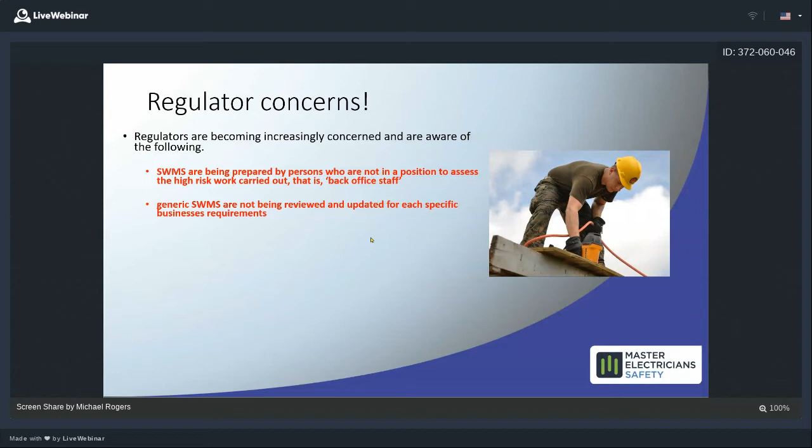That's a real problem, and I'll talk about that a little bit more later. There's some examples of people having SWMS for diving work in a folder on a construction site, where there was no diving work being performed, yet they were saying that the SWMS were specific to the site. Main contractors are not reviewing the content of subcontractor SWMS before work commences to ensure that they address the specific hazards of the construction project.

And on-site employees are not receiving instruction and training in SWMS, and that's a really important one. And if we get just these few things across today, it's going to make carrying out your work health and safety functions a lot more streamlined and a lot easier.

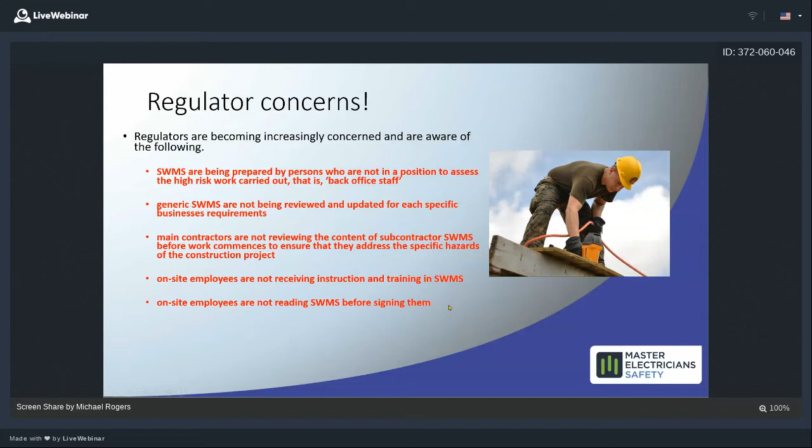On-site employees are not reading SWMS before signing them. In a lot of cases, people just rock up to site, where's the folder, put their signature on, and away they go. Then when a safe work inspector calls, if the work's not complying, the work's still being done, they're not stopping it. So the inspectors then stop it and say, okay, you're not working in conjunction with what you've agreed to do in this safe work method statement.

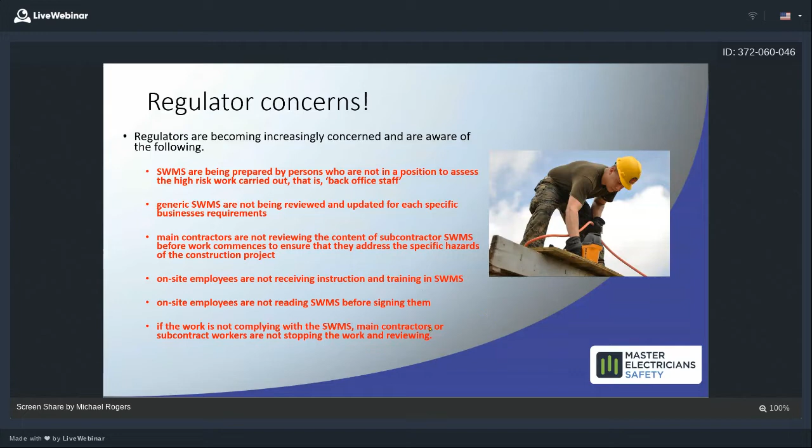And what I'm going to go through today is to try and dispel that myth that you need a SWMS for everything, and that you can really streamline your system. As I've said, the days of just buying packs, not reviewing them, not talking to your employees about them are over, if they ever really were in place.

So before we get to the SWMS, I'm just going to go through some industry jargon because we need to understand a few terms around the industry. So first of all, I think we all know what a SWMS is, safe work method statement. Then there's SOPs. If you've heard the term SOPs, that's safe operating procedures, but it can also be called standard operating procedures.

They can be for both safety-related things that aren't high-risk construction activities, as we'll talk about later, which is what SWMS relate to. But standard operating procedures can also include things like loading the photocopier with toner, or even how and where to save files on a network.

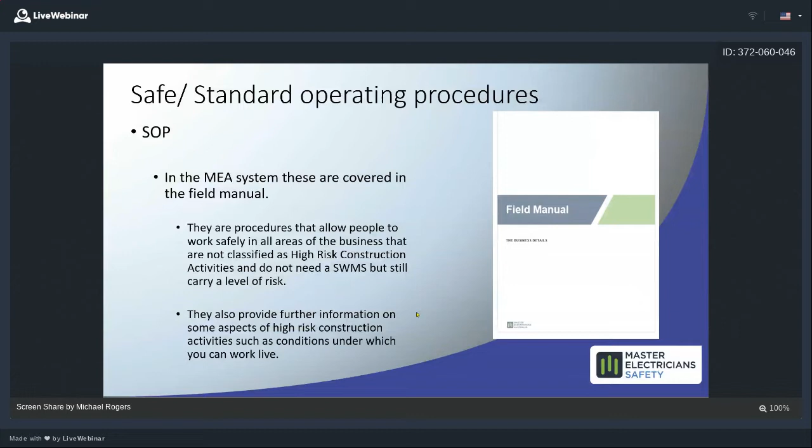Risk assessment - it's a legal requirement to carry out risk assessments prior to carrying out live work, and strictly under the four conditions for carrying out live work. Even if you've done a risk assessment, you still require a safe work method statement to be available on site.

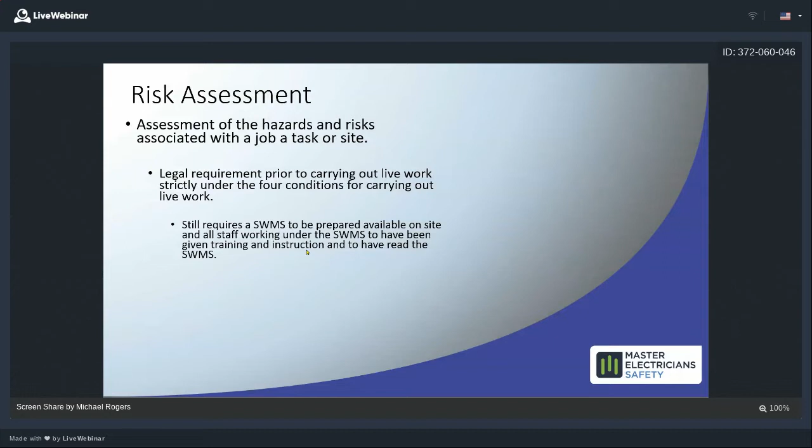The risk assessment is just about assessing the risks and determining whether or not that can go ahead. But the risk assessment is essentially just an assessment of the hazards and risks associated with a job, task or site.

They can be used as a means for developing SWMS. So if you're doing work in a particular type of construction all the time, you could do a risk assessment which assesses all the risks in that area and then develop your SWMS as a result. The overall process of risk identification, risk analysis and risk evaluation - that's the definition from the ISO guide.

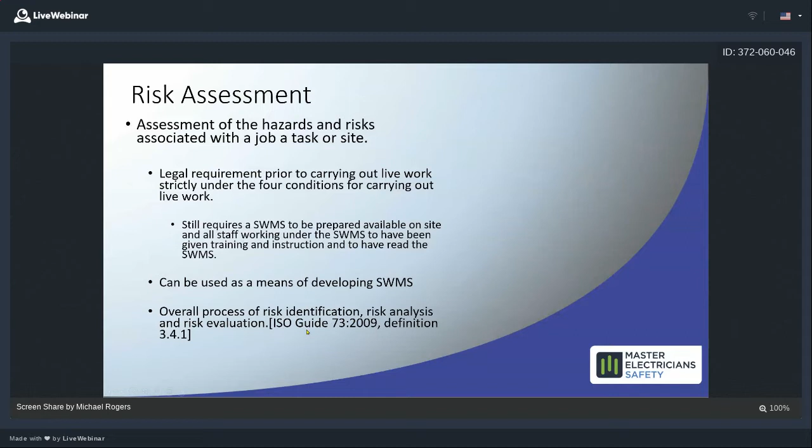A job safety analysis is a procedure which helps integrate accepted safety and health principles and practices - this is a definition straight out of standards - into a particular task or job operation.

In a JSA, each basic step of the job is used to identify potential hazards and to recommend the safest way to do the job.

Other terms used to describe this procedure are JHA, job hazard breakdown, and the other one you'll probably see is a JSEA, which is a job safety and environmental analysis, and that's quite often a term that's used as well.

Pre-start hazard assessment and control. This is probably one of the most important things that I want to go over today, and how that relates to SWMS and how it can really streamline how you manage your safety.

So this is the frontline control for hazard identification and control prior to starting work. It's essential and it needs to be documented, and I can't stress that enough.

If you are involved in a work site incident, this is one of the main documents that an inspector will ask for. They'll want to see how you identified and managed hazards.

The electrical industry is fairly unique in that every time we go to another site, we have a new set of hazards that we have to assess and control. So it's essential that we have this pre-start done, and I'll go through that.

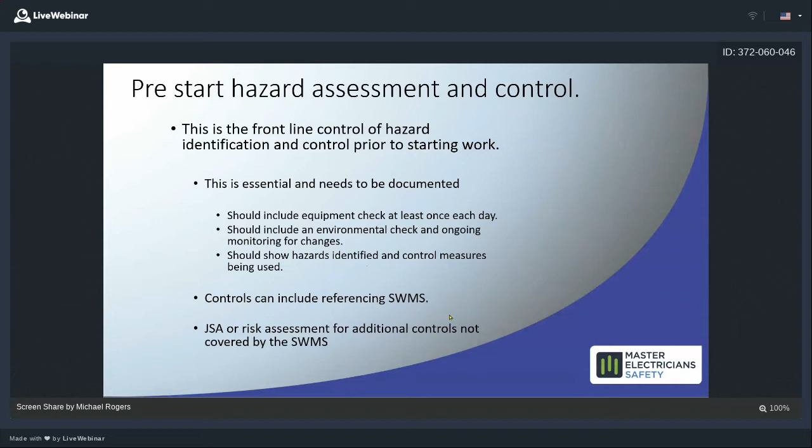I'll go through a simple form today that will show how this all fits together. First, definitions we need to know: the meaning of construction project, which is clause 292. A project, when a work health and safety person talks about it, involves construction work where the cost is greater than $250,000.

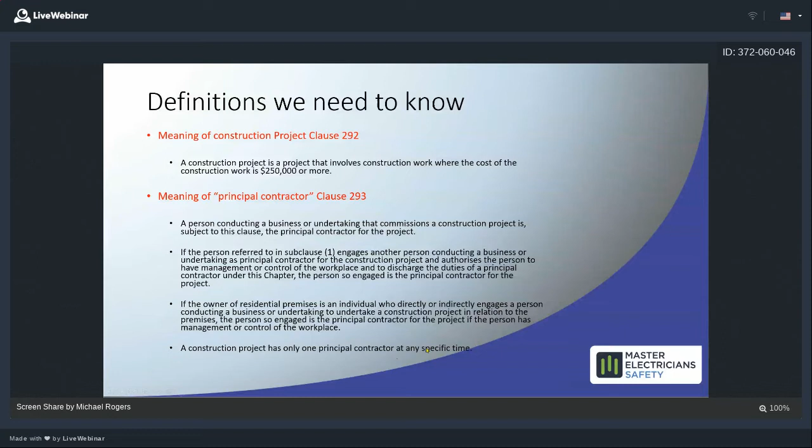That's a defined construction project, which in most cases will even include residential work. Now, the meaning of a principal contractor: the first definition is the person who commissions the construction project. That person can delegate control to a project manager, in which case the project manager becomes the head contractor for the purposes of who has to be given SWMS and who has to review them. If it's the owner of residential premises doing owner-builder work, you'll be the head contractor because you're engaging directly with them. There can only be one principal contractor at any specific time on a construction project, and this will make sense as we go through it.

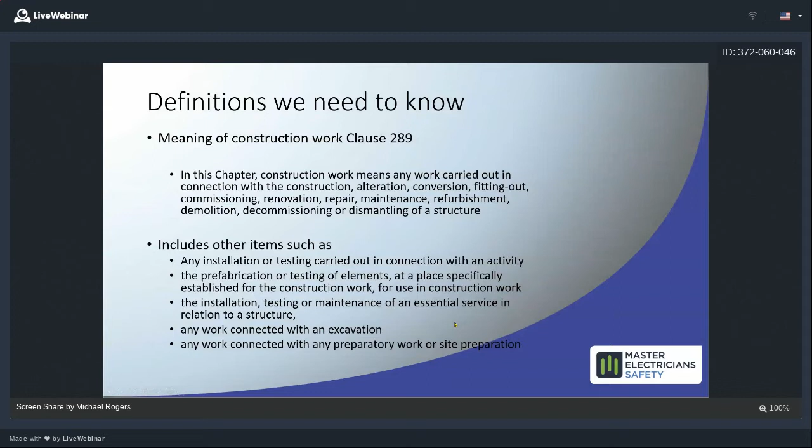Now we need to know the meaning of construction work. Construction work means work carried out in connection with construction, alteration, conversion, fitting out, commissioning, renovation, repair, maintenance, refurbishment, demolition, or decommissioning of a structure. Other items include any installation or testing carried out, which is fairly important for us. If we're testing switchboards, even if we're not modifying anything, we're still deemed to be carrying out construction work, and as such these high-risk construction activities require the use of SWMS. This also includes prefabrication or testing of elements, any work in connection with an excavation, and preparatory site work. So all of those things get roped into this meaning of construction work.

Now this is where I want to really clarify high-risk construction work, because these are what you need safe work method statements for, and they're very specific—not all of them are technical trade. I've highlighted the ones in red that we commonly come into contact with in the electrical trade.

The first one is where there's a risk of a person falling more than 2 metres—3 metres in South Australia—carried out on a telecommunication tower. There are people in the electrical industry that work on that, and you do need a safe work method statement. You've got to monitor radiation exposure and so on.

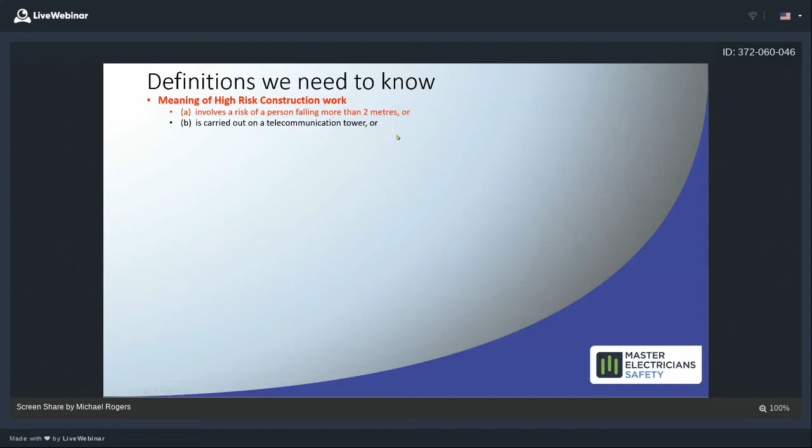Involves demolition—we don't normally get into demolition of load bearing structures, and if you are doing demolition, it requires a high risk construction license. So be very careful if you are doing that.

Involves or is likely to involve the disturbance of asbestos—that's another big one electricians are involved in. Involves structural alterations or repairs that require temporary support to prevent collapse. If you're doing anything where you have to pull something out, or if you've got to get cables through a wall or a subfloor that needs support, that requires a safe work method statement.

Is carried out in or near a confined space—that's another one that's fairly common for us. Is carried out in or near a shaft or a trench with an excavated depth greater than 1.5 metres—that's pretty much waist height. You're in a high-risk construction activity.

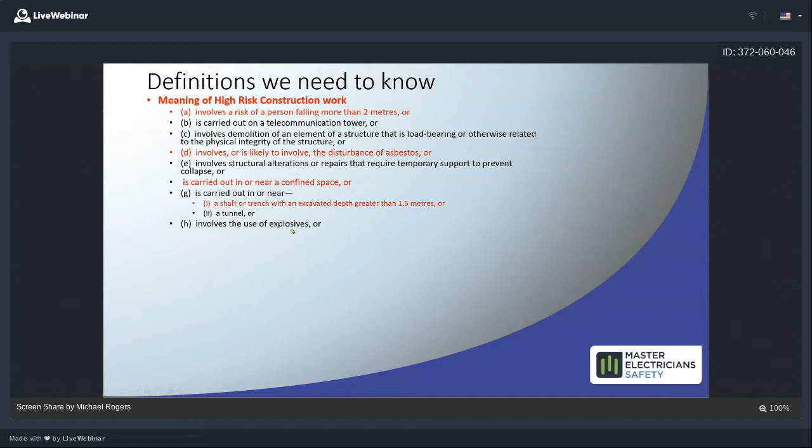In a tunnel or involves the use of explosives, and I always say to people that includes explosive power tools. If you're using explosive power tools, there should be a safe work method statement to identify how that's going to be done, the hazards and risks associated with it, and controls.

Carried out on or near pressurised gas distribution mains. A lot of electricians are unaware—it probably doesn't affect everybody, but if you're excavating towards a footpath where there's a gas distribution main, once you get within a metre of it, you're on or near, so you have to have a safe work method statement in place.

I can tell from personal experience, we actually hit a gas main doing a footpath excavation when I was doing level 2 work in New South Wales, and we were very thankful for having a safe work method statement in place when it came to being asked some serious questions. Also carried out on or near chemical, fuel or refrigerant lines—there are areas if you're working in refineries, or in large air conditioning installations.

Carried out on or near energised electrical installations. That's the other big one that we do every day of the week.

Carried out in an area that may have a contaminated or flammable atmosphere. So if you do work in service stations, then you're going to have a SWMS that clearly identifies the risks and hazards associated with that, which will include zone 0 through to 1 and 2, and what procedures you need to have in place to do that.

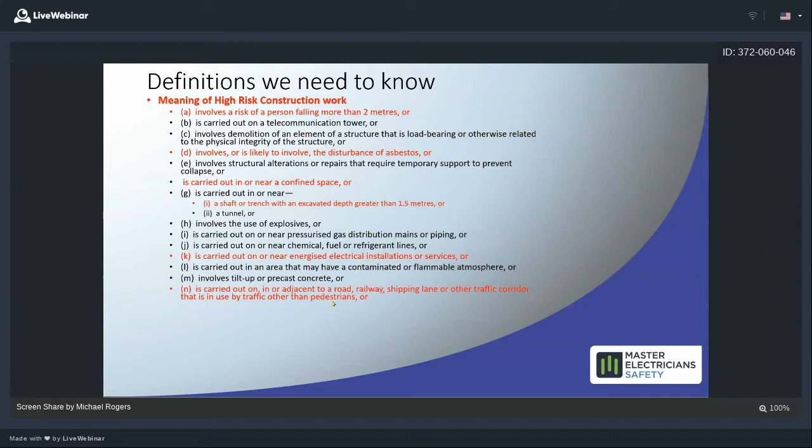Carried out on or adjacent to a road, railway or shipping lane or other traffic corridor used by traffic other than pedestrians. So if we're working beside the road, in close proximity to a road or traffic corridor, we should have a SWMS which will identify how we're going to control, whether it's barricades, traffic control or so on.

Carried out in an area or at a workplace where there is movement of powered mobile equipment or plant. Must have a SWMS for that, and it's very common if we're working around excavators, if you're working on a site with forklifts or movements, truck deliveries, then you must have a SWMS.

Carried out in an area of artificial extremes of temperature. This comes in probably more with refrigeration and some of the higher level refrigeration where you've got big chill, so it can be sub-zero temperatures. You have to have a safe work method statement for that.

Carried out in or near water or liquid that involves a risk of drowning. If you're doing work on marinas, there should be a safe work method statement. That's another one that's been identified. And then the last one involves diving work. We don't normally get involved in that.

So the red items there are probably some of the most common ones that we need to have a safe work method statement for. If you're involved in some of the others, if they strike a chord with you, however many of these boxes you would tick red is the maximum number of safe work method statements that you would actually need to have.

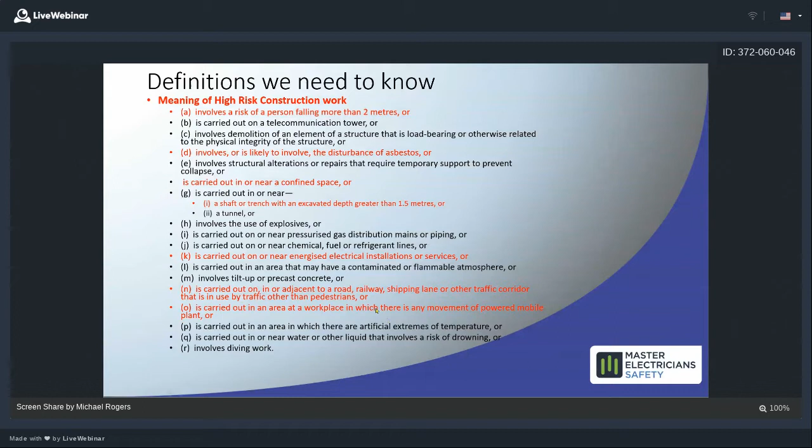Legislation. So let's just go into the legislation. It's fairly uniform across Australia. High-risk construction work legislative requirements under Division 2.

It says that a person conducting a business undertaking, carrying out high-risk construction work, must, before the construction work commences, have a safe work method statement prepared or prepared by another person.

Safe work method statement must identify the work that's high risk, and I'll talk about that at the end when we go through the sample SWMS. Specify hazards relating to the high-risk construction work, describe the measures to be implemented to control the risk, and describe how the controls are to be implemented, monitored, and reviewed. So that's fairly important, that part of legislation.

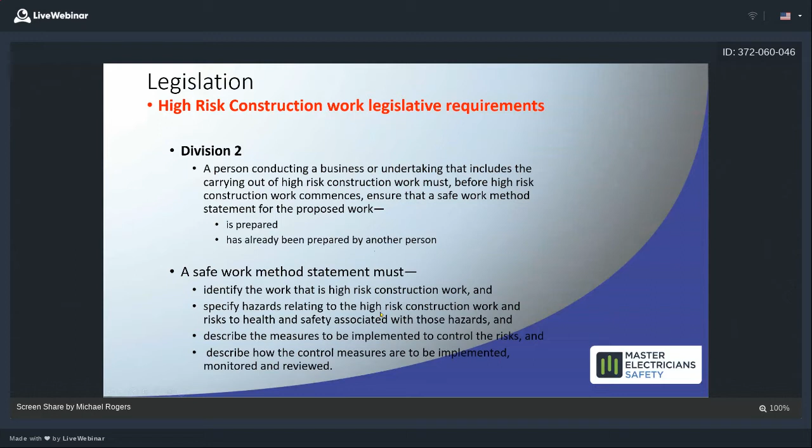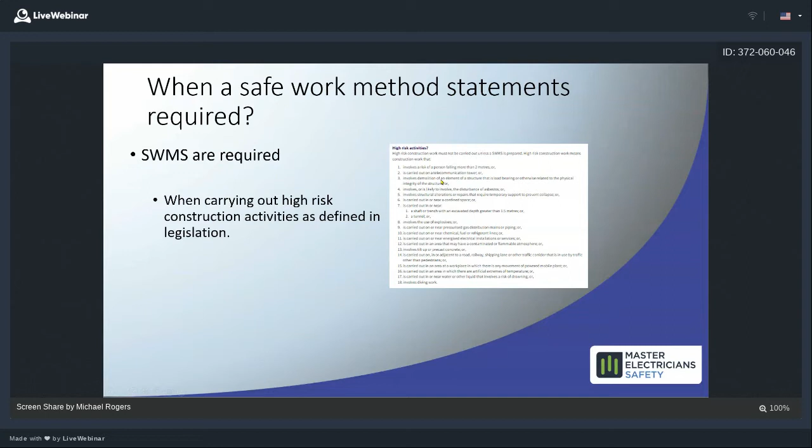When are they required? Again, we've got these 18 areas, and whenever we're working in an area that involves those, we must have a safe work method statement available on site.

So the PCBU must put in place arrangements for ensuring that the work is carried out in accordance with the safe work method statement, commonly referred to in work health and safety legislation as supervision. So that's what I was talking about earlier.

We don't want guys on site where you have an isolation procedure that stipulates locks, and none of them have got a lock on when a safe work inspector arrives. You must ensure that all people using the SWMS are trained and have read the SWMS prior to starting work.

Now, this seems to be a big job, but it's not. It's only got to be done once. So when you start an employee, if you've got 10 SWMS, you can give them some training on those SWMS, get them signed off on it, make sure that you're confident that they understand it, and then they can work on those SWMS all around the place.

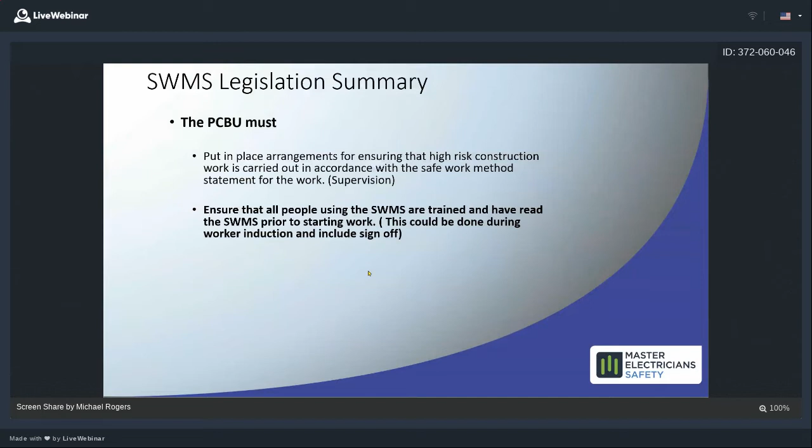And if they know them really well, they don't necessarily even have to look at them, and a lot of guys don't. They just get used to working on it, but they have to be available there if they need to just review it because they're not sure.

Work must stop if it's not being carried out in accordance with the SWMS, and resumed only in accordance with the SWMS. This is a really big one with the unions, particularly on big construction sites.

They will go and look at SWMS. They'll come around and look at controls that are in place. And if you're using a SWMS that says edge protection and the edge protection is not up to standard, the union will call safe work and stop the job.

And we've had prohibition issued against members for up to 7 days that they've stopped work on jobs. We've also had members who've been fined by fair trading after some of these things for breaches of licensing as well.

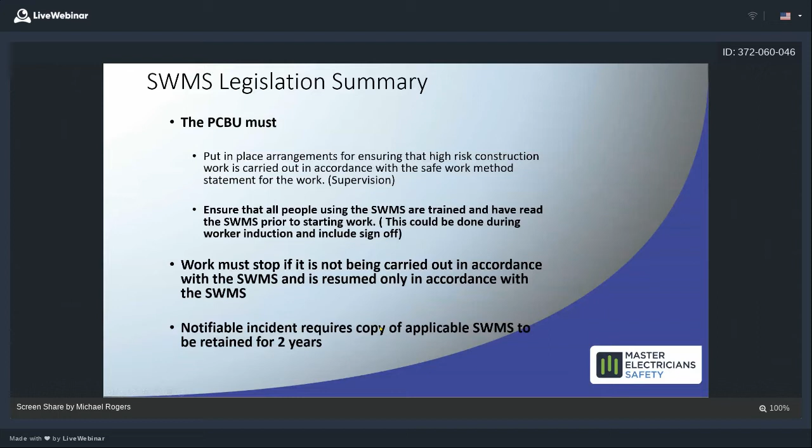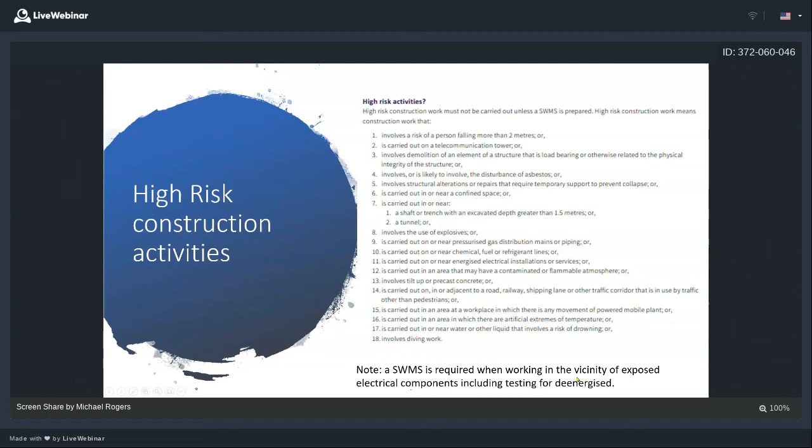That's just another overview of the 18 high-risk activities, but note a SWMS is also required when working in the vicinity of exposed live parts, and this includes testing for de-energised. So master electricians have an isolate, tag and lockout SWMS which covers for that.

There's the Federal Safety Commissioner who oversees a lot of larger construction sites and audits contractors who are going for government jobs - fairly high-end jobs.

This is really about what the Federal Safety Commissioner says SWMS should be and what doesn't need to be included in them. So a SWMS is defined as an administrative control calling on higher order controls within the hierarchy. We all know the hierarchy is elimination, substitution, engineering, admin - this admin point is where the SWMS fits in. The idea of the SWMS is to identify higher order ways that can reduce the risks to a level that's acceptable.

SWMS are not a step-by-step job procedure. The regulators now say they like to see them a maximum of 7 to 10 pages, because they understand that most people cannot comprehend more than about 7 to 10 pages of documents in a work environment when they're reviewing them and putting controls in place. I know of a case where a contractor received an improvement notice because of a 39-page SWMS, and Safe Work just said there is no way in the world that your guys can even tell me what's in that SWMS - I know it - and so they gave them an improvement notice.

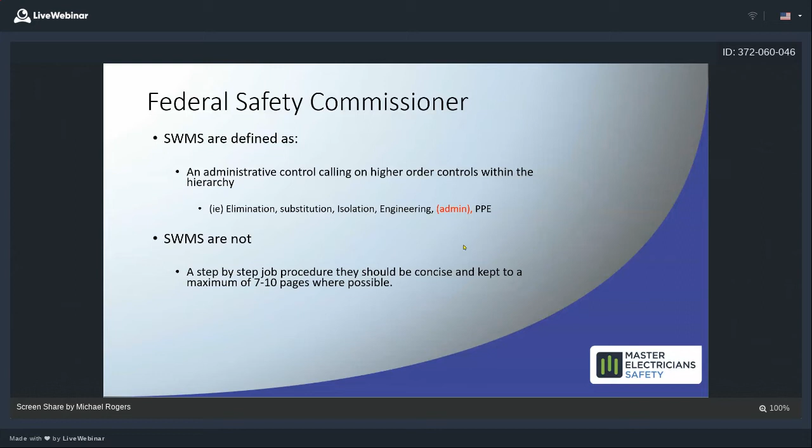So they're effectively an overview of the hazards, the risks associated with the hazard, and the control measures developed by the organisation in conjunction with the employees. This is fairly important, which I'll talk about later, why you can't just develop a SWMS on the fly.

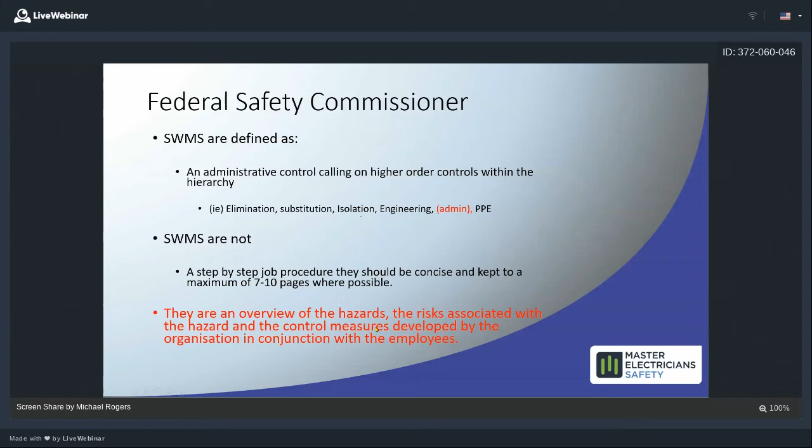So this is what the Federal Safety Commissioner has got to say - this is a document they put out which says SWMS must be specific to the works undertaken or the project. Generic SWMS can be used. If a hazard exists or is likely to exist on a site, it will be in a generic SWMS, and they definitely are in our generic SWMS, so you don't need to rewrite them all the time to fit a particular site.

The main thing they need is on construction projects over $250,000, where there is a head contractor, they must be specific to the site. In other cases where you're doing service work, moving around a lot and doing a lot of jobs, they can be generic SWMS, and they can just say that they apply to all sites and all work.

SWMS must identify the specific hazards - it goes without saying. Define control measures must eliminate - again that's the hierarchy of control - or minimise each of the risks. Controls must be in accordance with the relevant requirements from legislation. So when working at heights, for example, the controls have got to be one of the defined legislative requirements - either edge protection, positioning, or fall arrest. That's what that talks about.

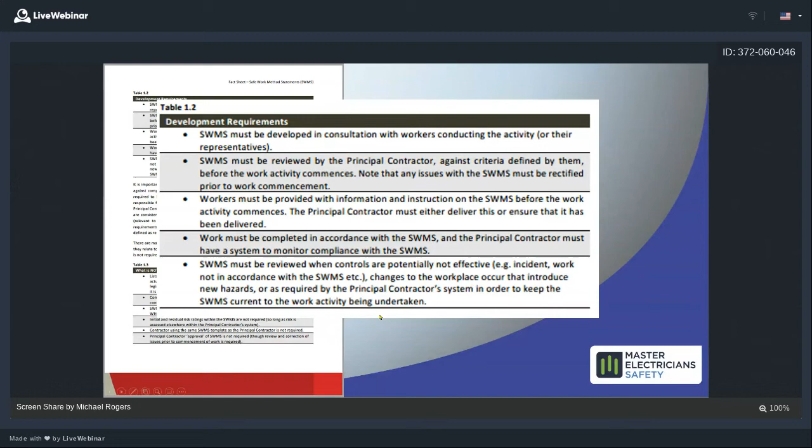And when we go through the Master Electrician SWMS at the end, I'll show how we've dealt with that. My preference is to leave it out as far as possible, because if you list a whole heap of Australian standards and you do have an incident, it provides a lot of fodder for a legal representative to prosecute you on - that you may or may not have access to those standards and may not be completely familiar with them. So simpler is better - complete quotes or sections from codes of practice shouldn't be put in them.

SWMS for activities - and this is important - SWMS for activities not defined as high-risk construction work, as per the jurisdictional WHS Act or regulations, are not required. And it's not only these days that they're not required. Safe Work don't want to see them, because they really do believe that they're confusing the issue, where people don't know the difference between a high-risk construction activity and an activity. High-risk construction activities are statistically the activities that cause major harm or fatalities.

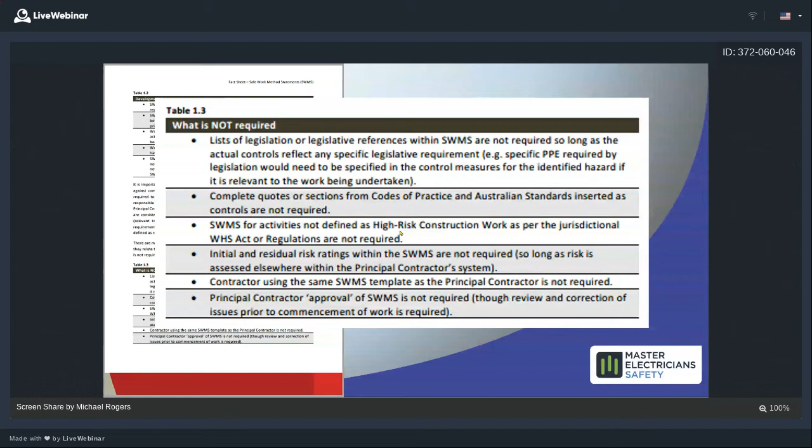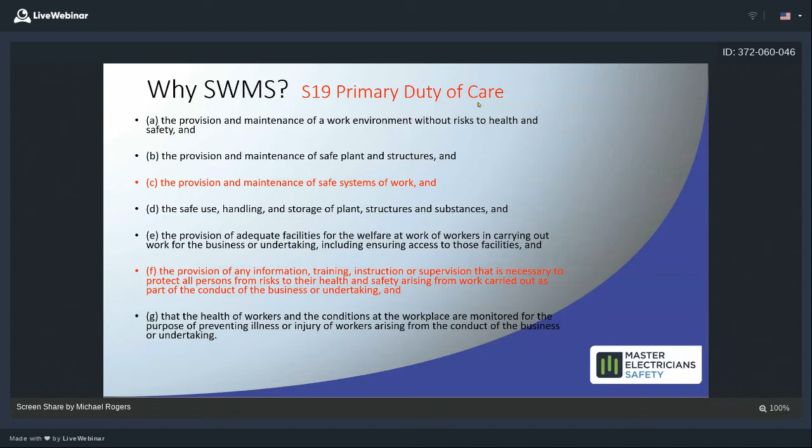Okay, why do we need SWMS? So Section 19 of the Act - and if you ever read through prosecutions on any of the various state websites about successful prosecutions, you'll see a lot of them are prosecuted under a failure of Section 19, primary duty of care of an employer. And this point C here, the provision and maintenance of safe systems of work, that is directly having safe work statements for the high-risk construction activities.

And the other one is provision of information, training, instruction, or supervision that is necessary to protect all persons from risks to their health and safety arising from the work carried out.

So when people are working under a SWMS, periodically - for a smaller contractor it may only be once every 3 months - but every so often we should do an audit of our workplace, make sure that if we've referenced SWMS in our pre-start, that we've got all of the controls in place, and that we haven't just got people working however they want. That's part of the SWMS requirement, and this particular Section 19 is often what you'll see the prosecutions arising from.

So basic steps for managing WHS - this is a basic system that will keep you compliant. It's going to make it a lot easier for you to manage. I'm not talking about a system that can be audited against the Australian Standard 4801 or ISO 45001.

They are extremely complex documents and really only applicable to very large scale operations - oil refineries, oil platforms, large operations, mining, and so on, and very large tier construction. So what we're going to cover here today is a system that's designed at simplifying what you actually need to do. So step one: have all the key elements in place. You need policies, procedures, you need safe work method statements for any of the high-risk construction activities you engage in, safety data sheets for any chemicals that you use.

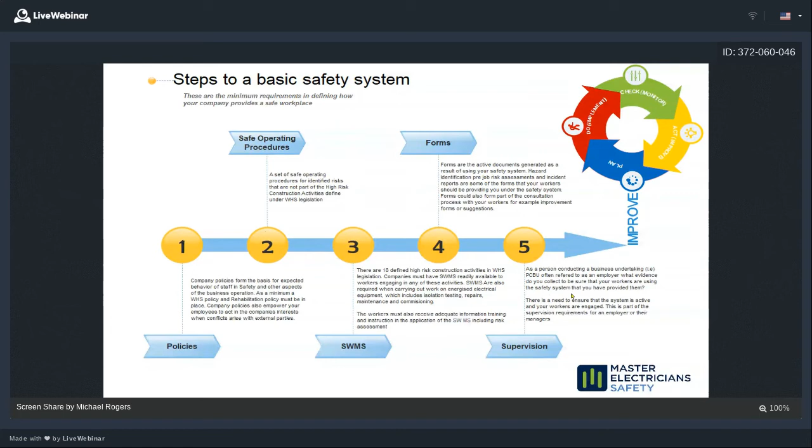You get a risk assessment app, which you can use, or you can use a paper-based form if you like. So we actually have an app that allows you to do risk assessments and pre-starts and records them all for you on the fly. You need some additional forms for consultation and improvement, which this app also does.

It allows you to do ladder inspections, equipment inspections, and if your safety system is working, which is what the expectation is, everything that's documented in a safety system is really just documenting a procedure that you're going to follow to make sure that your guys are working safely and that you're giving them the right information and training to make the right decisions.

So these are the things that your safety system should be producing if it's working. And then you also need to be able to verify some supervision. So that's, like I said, just supervising, watching the guys on jobs. There's no legislative requirement that it has to be done daily. It can be done once a month, once a quarter. But as long as you've got something that matches your business and the level of activity, you're pretty well covered in that.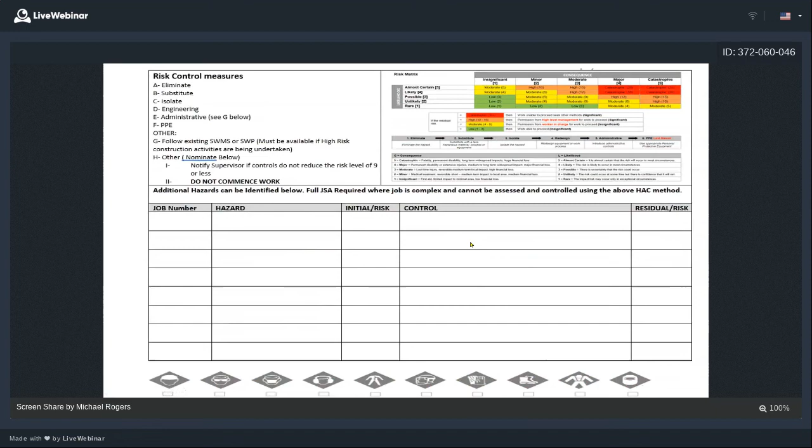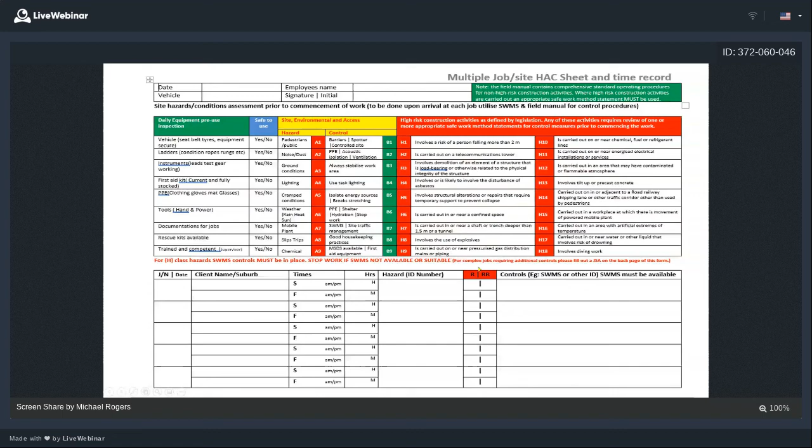Okay, so this is where we say SWMS have to be readily available. SWMS must be readily available to your workers wherever they are working. Now, the requirements are left up to the PCBU - the owner of the business really is the person who you're going to deliver those SWMS to.

They could be paper versions in a folder in the vehicle. There's some real benefits of that, but the disadvantage is that sometimes they get taken out, they don't get put back in, and if you have a number of vehicles, if you modify one in 12 months' time and review it based on feedback you've had, you've got to go through and update all the vehicles with a paper-based copy. They can be available on a tablet.

A lot of people are using iPads these days, so that they can be available electronically, on a folder left at the construction site. That's a very common way for large projects where people have a shed on the construction site, and there's a sign-on, sign-off sheet, toolbox talks, and all the SWMS are kept in the folder. Same thing - they do get taken and sometimes not put back, so that's another issue.

Electronically, via a phone, you can have them in Dropbox, you can have them on a Google Drive, you can have them on OneDrive. There's nothing in the legislation that restricts you from how you want to provide these to your workers.

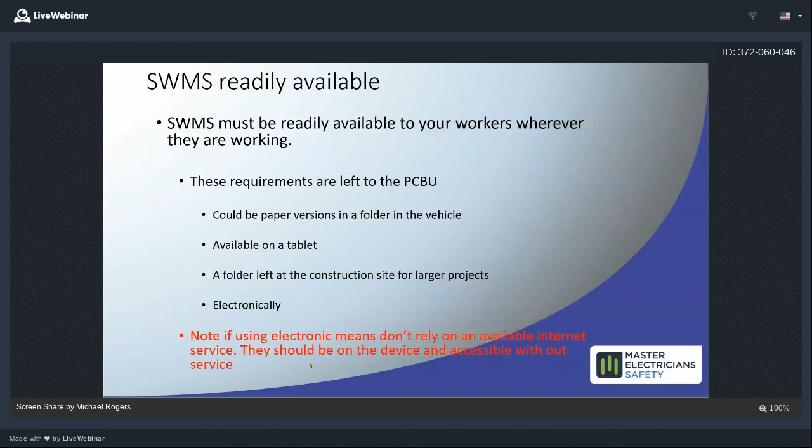Okay, a couple of FAQs that I get from our members. Does a worker prepare a SWMS for the site when they arrive to start work? Short answer is no. SWMS have got to be prepared in consultation with workers, approved by management. They're a document, more of a static document than an active document, and the workers must be given training and instruction which must be recorded to determine their competency to work under that SWMS.

So you can't prepare a SWMS on the fly and say, I've got a safe work method statement. You can't comply with the requirements of the legislation by doing that. They've got to be prepared once and then used many times. And this is how you start to have a system where all you're needing to do is reference the SWMS as a control.

How many SWMS do I need? You need a SWMS for each high-risk construction activity that your workers may face in their daily schedule. For many electrical contractors, 10 SWMS covers the scope of their work - but there's still nothing stopping you from having more.

So there's two ways that you could do it. You can reference SWMS. For example, if you are working at heights and working on or near live on a job, you reference the two SWMS as your controls.

But if you are doing a job that is the same all the time, like installing electric roller doors, and that's all you did in your company, you could have one SWMS that addressed the specific high-risk construction activities you dealt with in installing roller doors, and you could get away with one SWMS that you just have to reference. You just have to be very careful that that SWMS covers every possible combination that you guys can face, and that's where having the 10 and referencing more than one is often better.

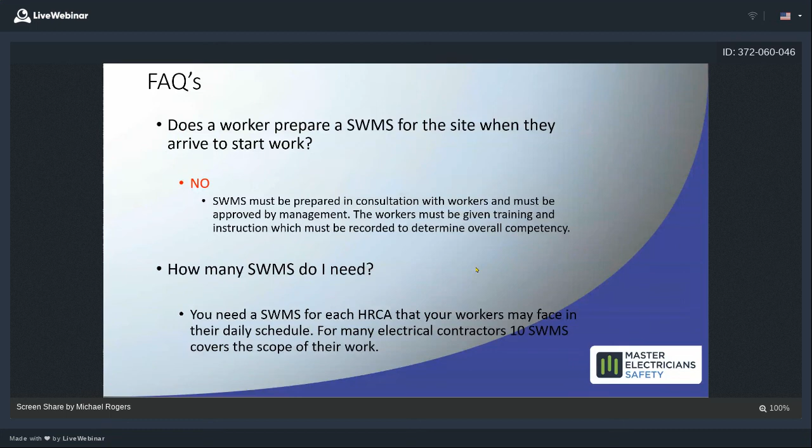My work is repetitive, can I have one SWMS? Yes, provided it covers all the high-risk construction activities and can be implemented on all sites and conditions you're likely to encounter. Is referencing multiple SWMS in the pre-start an acceptable way to control high-risk construction activity? Absolutely, but the SWMS have to be available in whatever form you determine, and readily accessible when an inspector calls or when an employee needs to review them. That's why simplifying SWMS, keeping them short so they can be scanned quickly, ensures all the appropriate hazards and controls are identified.

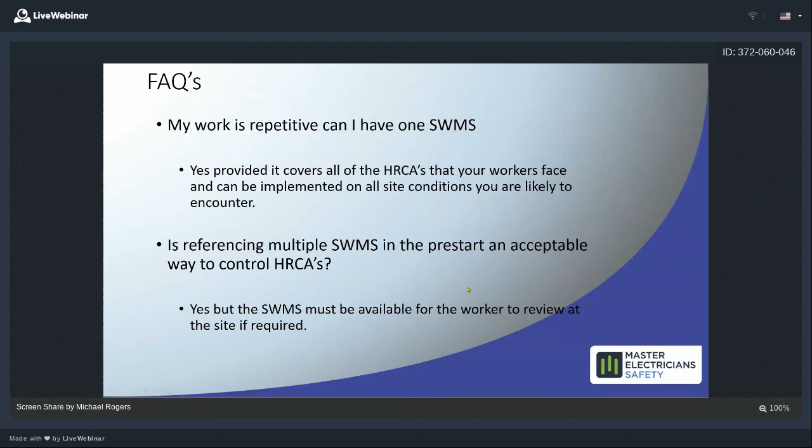This is a sample of the Master Electrician's Safe Work Method Statement, a couple of cut and pastes from ours. This one is for asbestos. It gives you a place to put the project title and address. If you're working on multiple sites in a day, that covers it. If it's a construction project over $250,000, it has to address the title and project address.

They can still be generic and you add the address details. Company name, supervising site worker, that can be all workers inducted on this SWMS or signed onto it, or a list of workers working on a construction site together. For personnel consulted in development, if you're a single operator that can be one person, or as many as you feel you need, provided you can demonstrate you're getting the required level of knowledge of the hazards associated with the job.

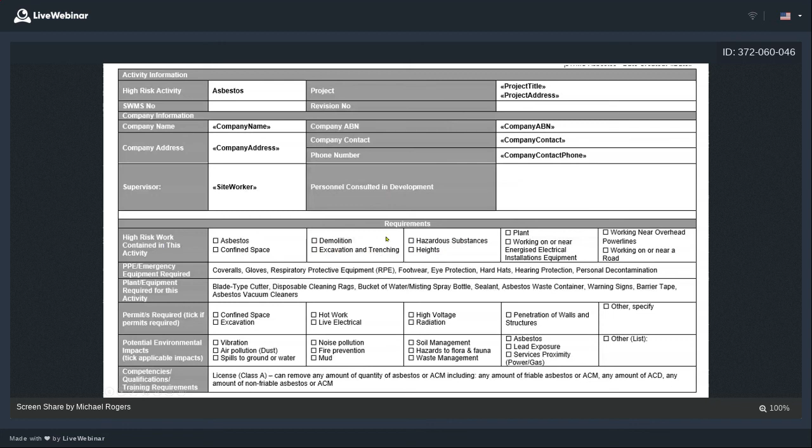It's got the high-risk work identified: demolition, excavation, trenching, hazardous substances, heights. So we tick those boxes in the SWMS. It's got a way of determining risk.

The way Master Electricians use their risk matrix is we have a likelihood, and each has a value up to 5. If something is likely to happen, it's a 4, and if it's a moderate consequence, it's a 3. We multiply those together to get 12.

If the residual risk is 1 to 3, work can proceed, it's insignificant. Higher ranges require permission from worker in charge or high-level management. So if a control on the SWMS is risk assessed and you're in the 10 to 15 range, as a business owner you want to know about it before someone proceeds. There have been so many fatalities where people have gone ahead thinking it should be okay instead of stopping work and asking for more advice on how to control it. So that's our risk matrix.

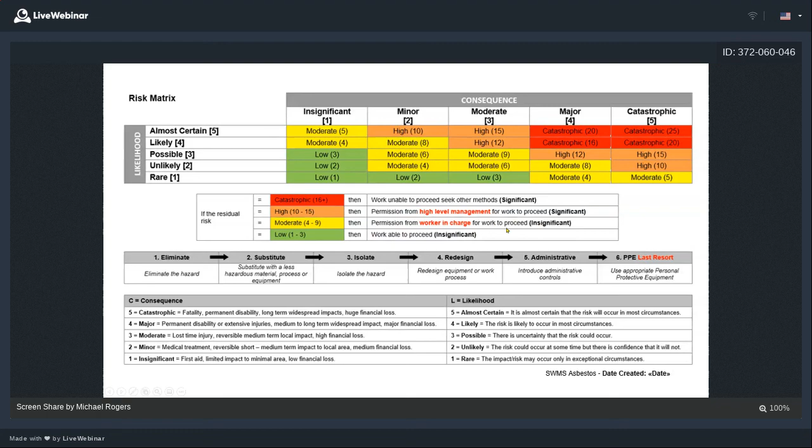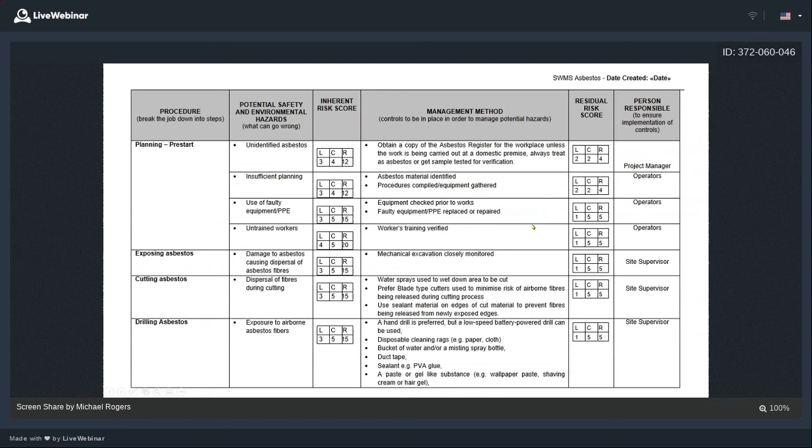This is where some companies still require the legislation, so we've put our legislation on the last page. You can leave it out, and that way it's not brought into any proceedings. It's not required by the Federal Safety Commissioner, but some builders require it, so if they require it, you leave it in. If they don't, you can take it out and it won't affect the validity of the SWMS in any way.